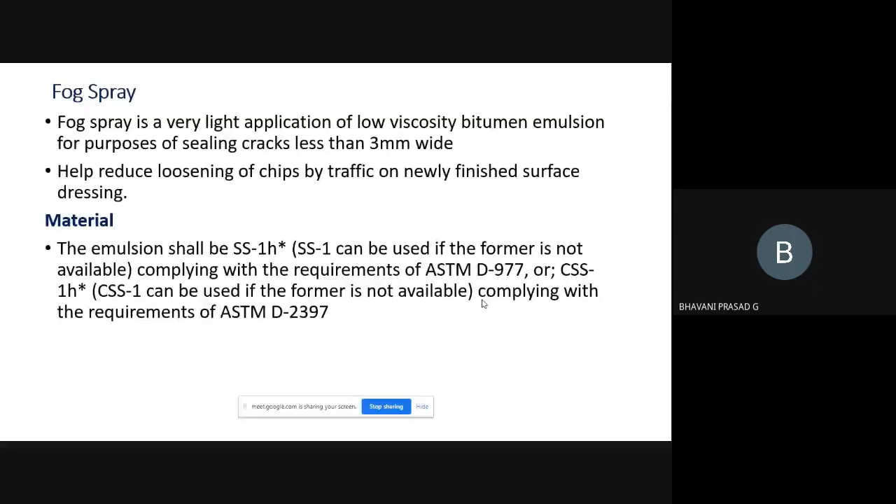So now let us discuss another mix used for maintenance of the pavements, what is called fog spray. Yesterday we were discussing about the slurry seal, a similar mix used for maintenance. Some kind of other mix used for maintenance is fog spray. You may have to remember that slurry seal and fog spray are not widely used in our practical maintenance works. The road agency engineers are not using this widely. They're supposed to use this, but they're not that familiar, or probably not using this slurry seal, or even this fog spray.

But the thin layers we discussed, they are used. The OGPC is widely used. Again, surface dressing is not widely practiced, maybe 15-20 years back it was widely used. Now the widely used thin layer, at least in Karnataka, if at all they are using, is OGPC, mixed seal surface, and micro surfacing. As I said, it is very new, not has become a practice here yet in the country.

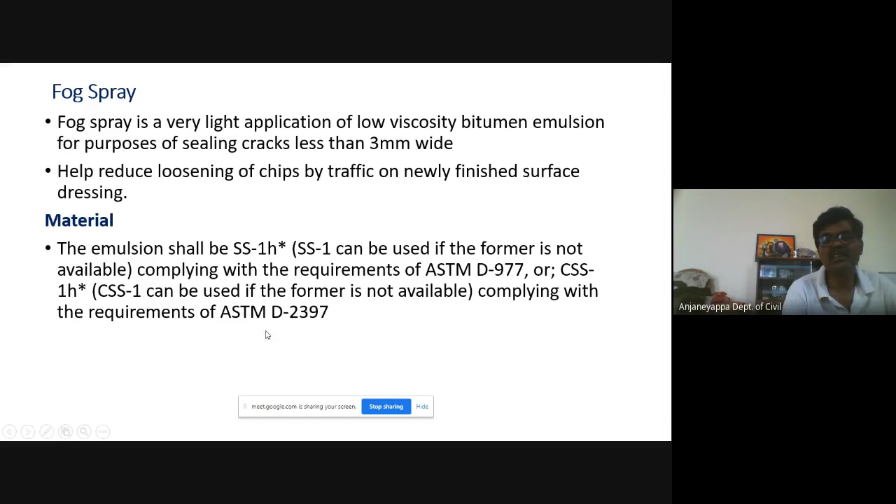The material used for fog spray is SS1, slow setting 1, or SS1H, which meets ASTM D977 requirements. If this is not available, the specification says CSS1H can also be used, but again this should meet ASTM D2397 requirements.

So we can see a video of this fog spray, I'll play that. Am I audible? Yes, sir. Thank you. See how fog spray is practiced. As I said, not widely used here, but these are all very good maintenance activities one should practice for maintaining the pavements as a preventive maintenance measure. So unfortunately, slurry seal and fog spray are not widely practiced, not even practiced, I believe.

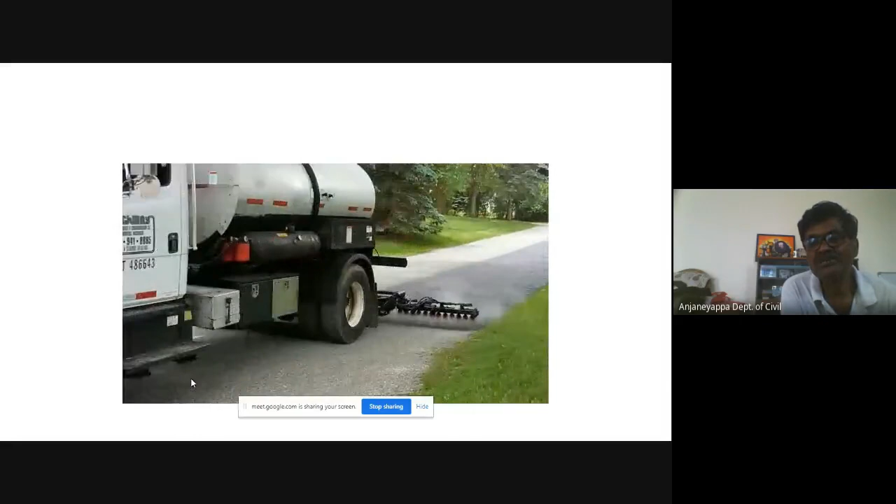See the emulsion spraying machine. The pavement below is highly oxidized, the surface layer, and they are spraying this emulsion, slow setting emulsion. It enhances the life, it seals the surface, it seals the cracks of smaller width.

So this is fog spray, mechanized spray. Before using this emulsion, the emulsion is diluted with 1 part of emulsion to 1 part of water. Alternatively, this type of emulsion can also be used, A1-40 or K1-40, which complies with BS434 requirements, British Standard 434 requirements.

These emulsions, whatever we use, should have lower viscosity. In case you use these emulsions, A1-40 or K1-40, they are rapid setting emulsions, and these emulsions need not be diluted.

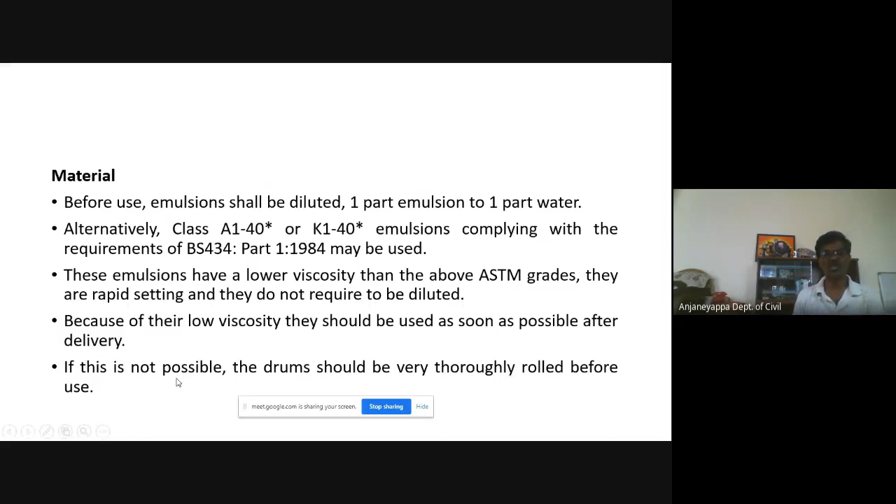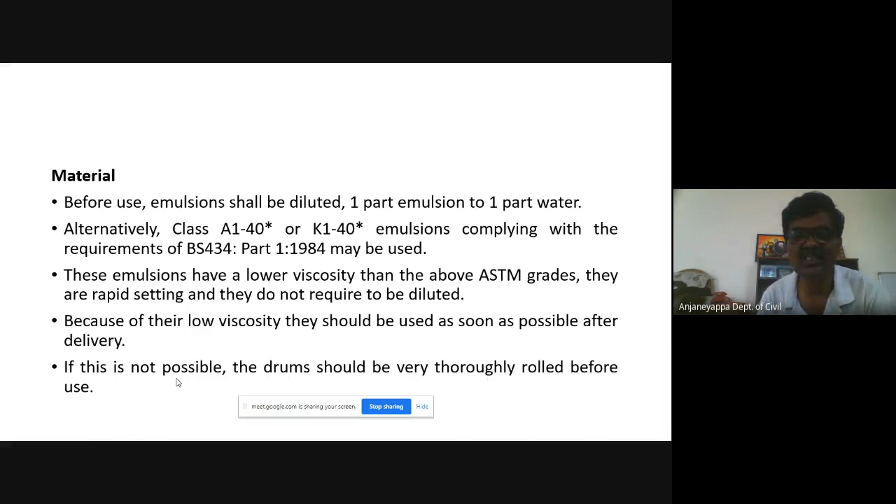So because they are low viscosity, they should be used as soon as possible after delivery. They should not be stored for a long time. Immediately on receiving the emulsion, it should be used for application. Suppose the application is not done quickly, then drums in which the emulsion is stocked should be rolled before use, so coagulation will not happen. So before using any emulsion that comes in drums, they are to be rolled so that the water and the emulsion mix together and avoid any coagulation. This is very important before using any emulsion, irrespective of the type.

So the fog spray shall not take place when the temperature is below 10 degrees centigrade, or during dusty or windy conditions, or even when it is raining. In these conditions, the fog spray is not to be carried out.

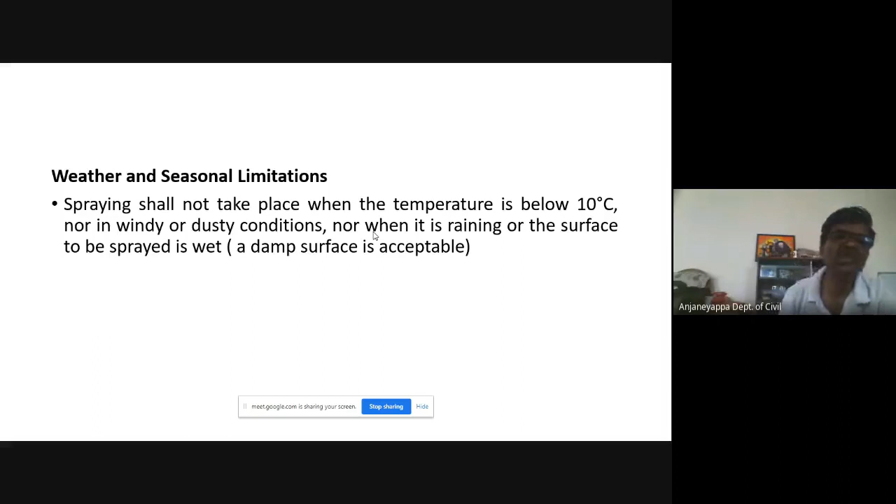So these are some of the construction operations for fog spray. The equipment we use should be a self-propelled or towed bitumen pressure sprayer, similar to the one we have seen in the video. This equipment should comply with the requirements of the IRC manual for construction and supervision of bituminous works. In your free time, please refer to this; it is a wonderful manual for construction and supervision of bituminous works.

They have specified the equipment's requirements. The spray bar, whichever is used for spraying the emulsion, the equipment should be protected from gusts of wind by means of a hood. So the equipment we use, of course, needs to be calibrated.

Preparation of surface is the next step, the surface on which we're going to spray this fog emulsion. This fog spray should be applied on a thoroughly cleaned surface, cleaned using compressed air or even scrubbers. The cracks shall be cleaned with the pressure air jet to remove all dirt and dust.

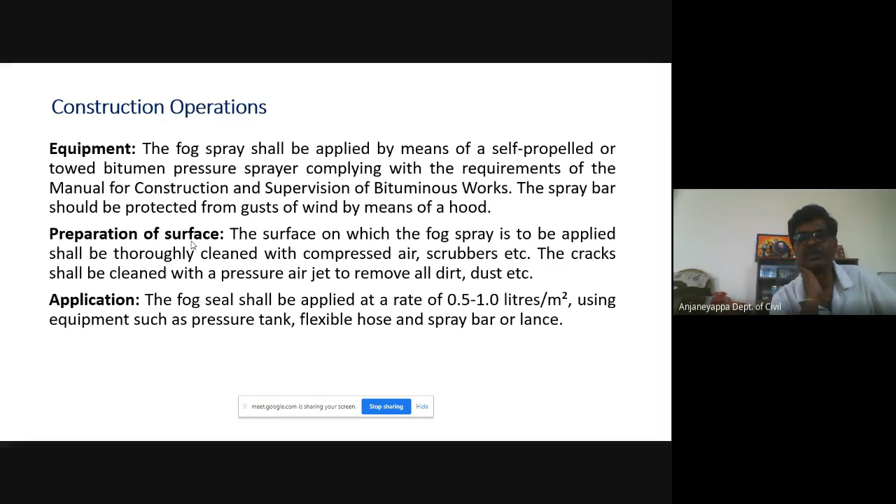Once the receiving surface is prepared and cleaned properly, then comes the application of the emulsion. This emulsion, the fog spray, is applied at the rate of 0.5 to 1 liter per meter square area using equipment such as pressure tank, flexible hose, and spray bar.

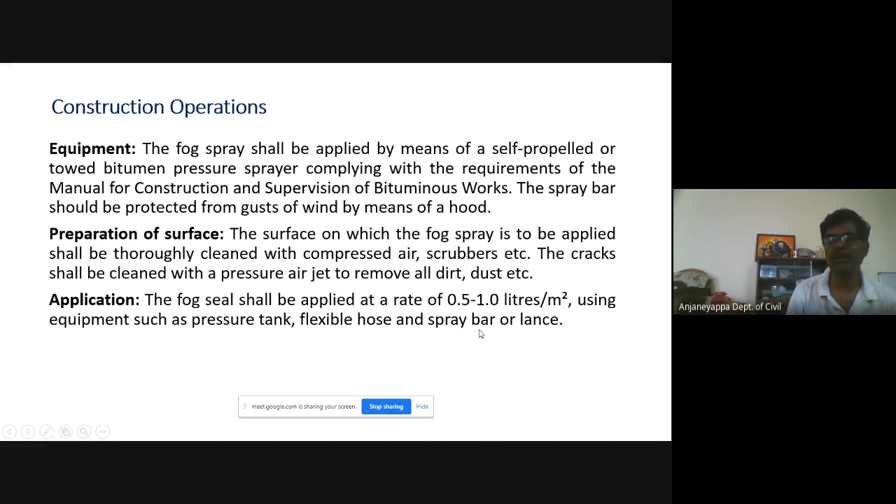If specified in the contract or ordered by the engineer in charge, the fog spray shall be blended with graded grit of 3 mm size. Grit means the small chips, the small size crushed aggregate pieces. So this fog spray can be mixed with this 3 mm size chips.

Chips coated with about 2% of emulsion by weight. This pre-coated grit, the chips, shall be allowed to cure for at least 1 week so that they become non-sticky and can be spread easily. So if you want, you can spray this 3 mm grit size material along with the emulsion. Only thing is the 3 mm graded grit should be pre-coated with emulsion 1 week before spraying so that they become non-sticky. That also can be done.

Then comes quality control during the fog spray. The materials quality should be carried out as per section 900 of the MORTH specification.

Do you have MORTH soft copy, 5th revision? Yes, sir. Please go through that. Only one man is telling? Yes, others are. What about others? Do you have it? Yes, sir. Okay, open section 900, there it is clearly mentioned.

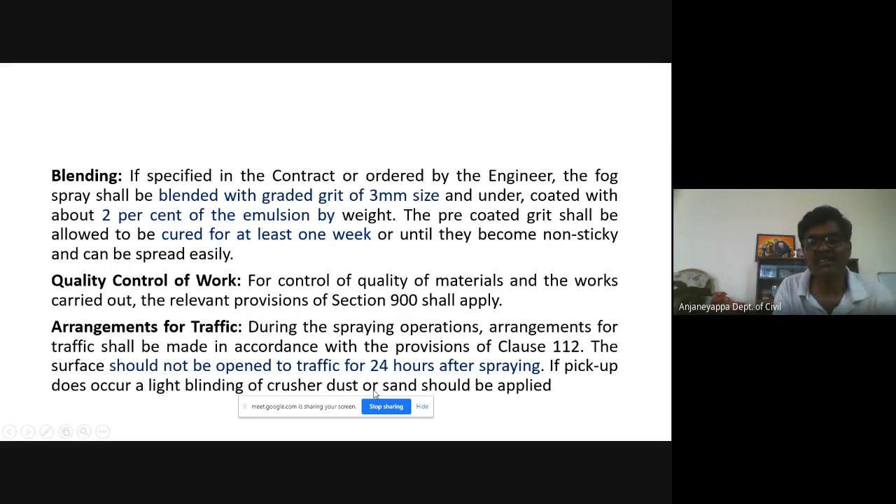Section 900. So during construction, needless to say, arrangements for the traffic are to be made. The surface should not be open to traffic for 24 hours after spraying. This is a tricky issue, we cannot block the road for 24 hours. This is because if the traffic is allowed, the materials will get picked up by the wheels.

So totally, fog seal is designed to coat, protect, or rejuvenate the existing oxidized bitumen binder. It regenerates, it gives a fresh look for the surface, as you have seen in the video. The oxidized pavement, once the spraying occurs, it looks fresh.

So it seals the coat, seals the bottom layer. It improves the waterproofing of the receiving surface, reduces the aging, lowers the permeability, and to renew an old bituminous surface which has become dry, brittle, hungry, this fog seal can be used effectively.

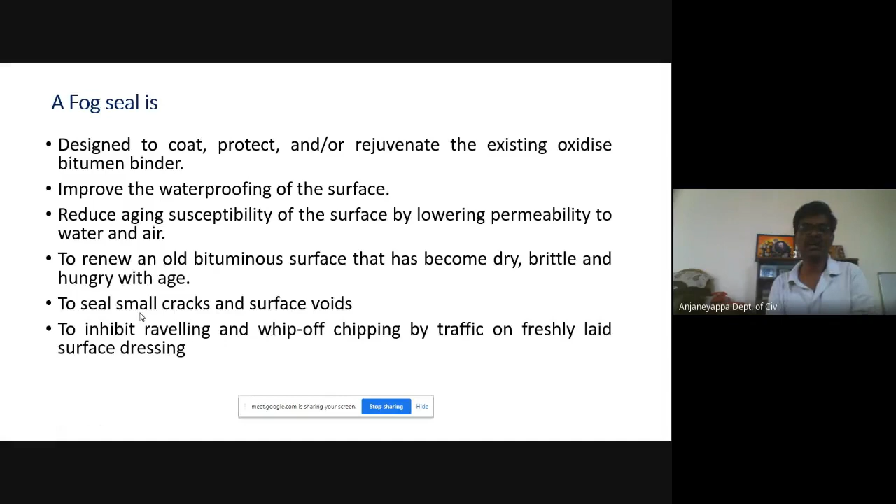And fog seal, as said, can be used to seal cracks of width lesser than 3 mm, and also to seal small surface voids. This also prevents raveling, chipping of the aggregates by traffic, of the surface dressing layer.

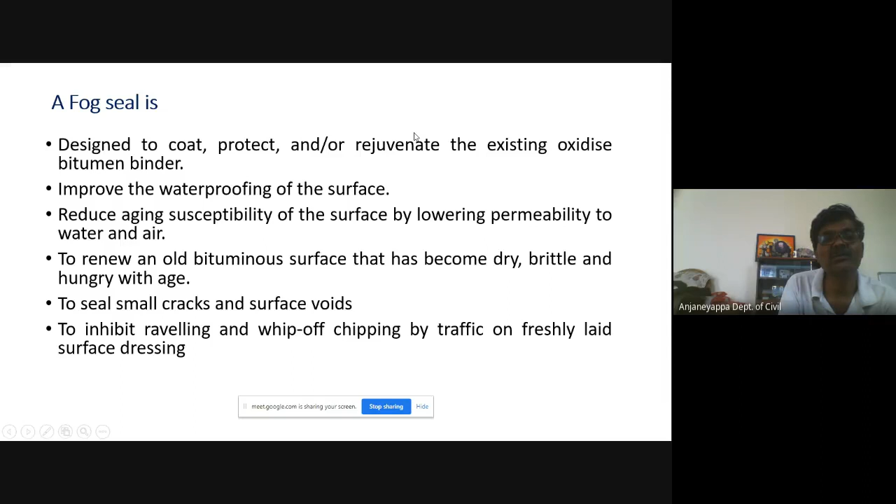So these are some of the applications and advantages of using fog seal. But there again, there are some limitations for the fog seal. They are not useful as seal coats on closely graded surfaces. If it is an open graded layer, something like mixed seal surface, surface dressing, chip carpet, this can be effectively used.

For a closely graded surface like mixed seal surface or dense graded surface layers, fog seal is not useful without the addition of chips, because if you just spray fog seal, that may create a slippery surface. So for that reason, if you add the grits or chips, you get a non-skiddy surface. That is one limitation.

Fog seals are not to be used on a rubberized asphalt concrete surface or polymer modified mixes unless the pavement is 5 years old, as these binders age at a different rate. Many times we use modified binder, polymer modified bitumen or crumb rubber modified bitumen for bituminous concrete surface layers. On such layers, fog spray is not generally recommended unless the pavement is old.

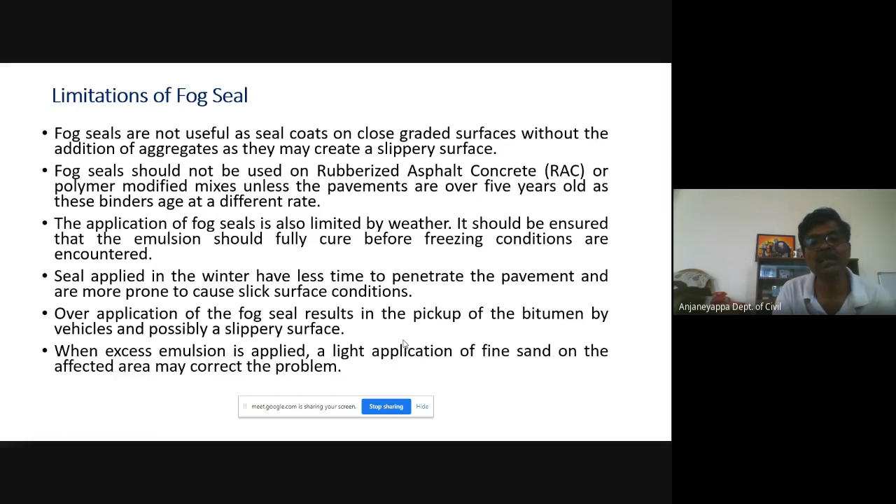But whatever the limitations or advantages, this is definitely one of the preventive maintenance activities used for bituminous layers, and we should practice it, whether it is slurry seal or fog spray. Unfortunately, we are not practicing this in our country.

You can see another one. Then comes crack sealing. Another maintenance activity that we do for asphaltic pavements is crack sealing. The name itself indicates it is for sealing the cracks. See this video, how crack sealing is done.

Am I audible? Hello? Yes, sir. Thank you.

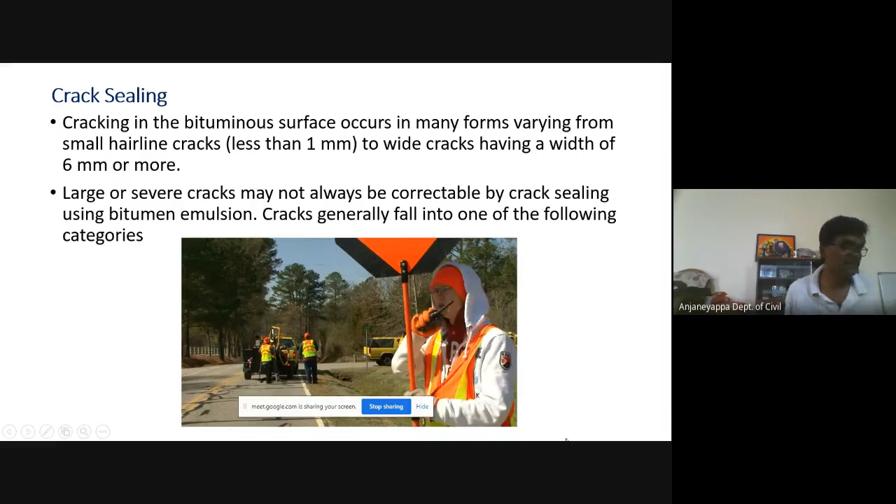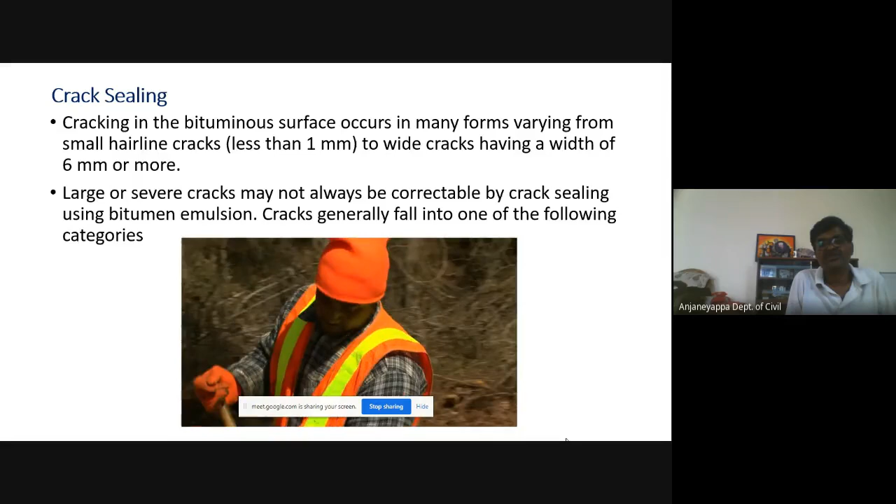Crack sealing is one of the preventative measures NCDOT uses to extend the life of our state's roads. It's a simple and effective way to ensure that our roads last longer and remain safe for travel. When it rains or snows, water can get underneath the pavement and cause cracks, potholes, and other dangerous driving conditions for motorists. In fact, the most destructive element to our roads is water. Sealing cracks will keep water from deteriorating the pavement. It also extends the life of our roadways by 3 to 5 years.

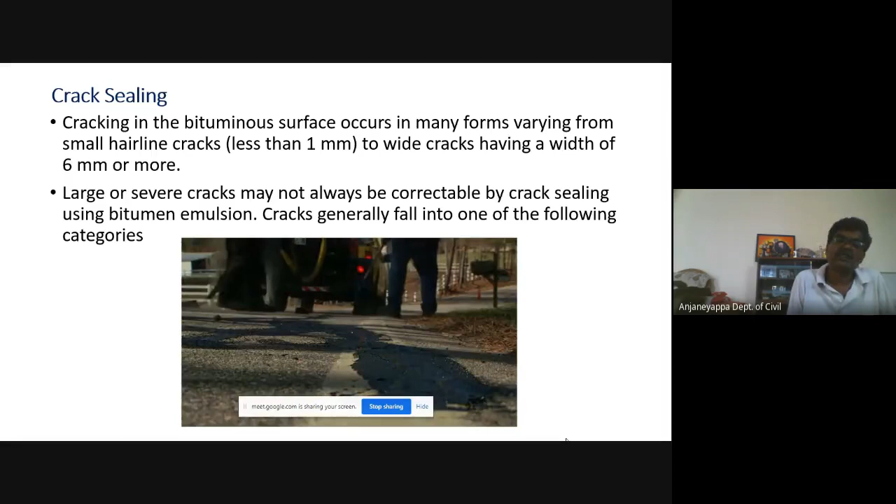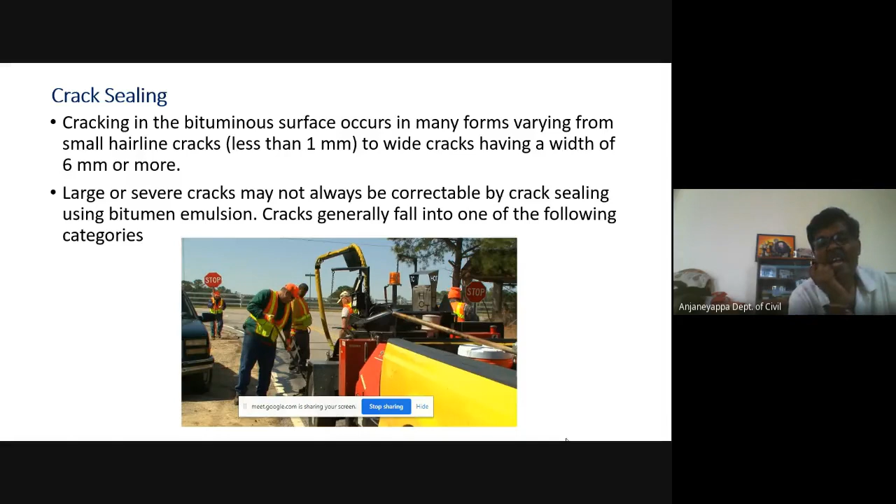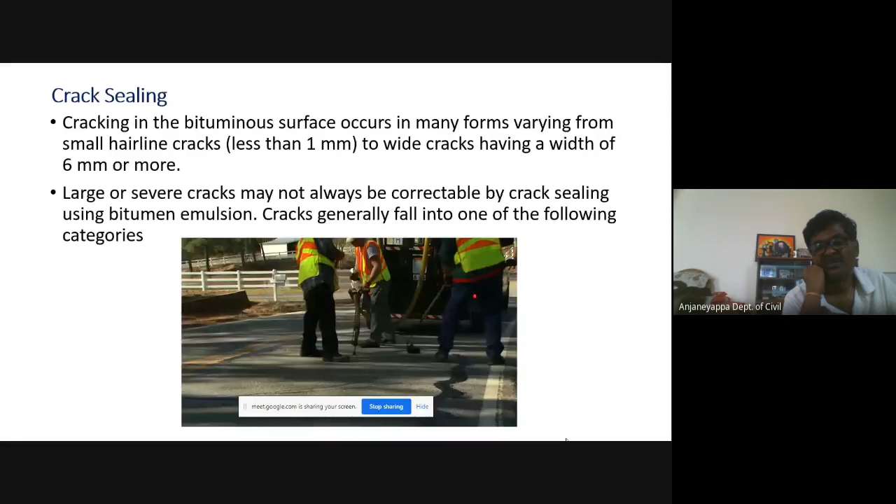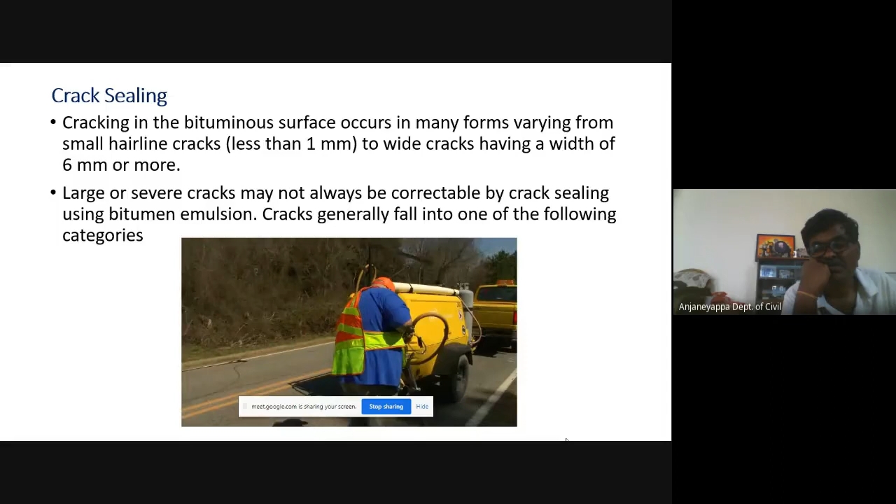As seasons and temperatures change, pavement expands and contracts, and cracks expand and contract along with it. To prevent the cracks from getting bigger and causing further damage, NCDOT uses a rubber material to seal the cracks. The seal bonds to the edges of the crack walls and moves just as the pavement moves, keeping water from getting under the base and subbase layers of the road. However, before sealing the cracks, crews must take several essential steps to ensure the seal is properly applied and that it will effectively prevent any further road damage.

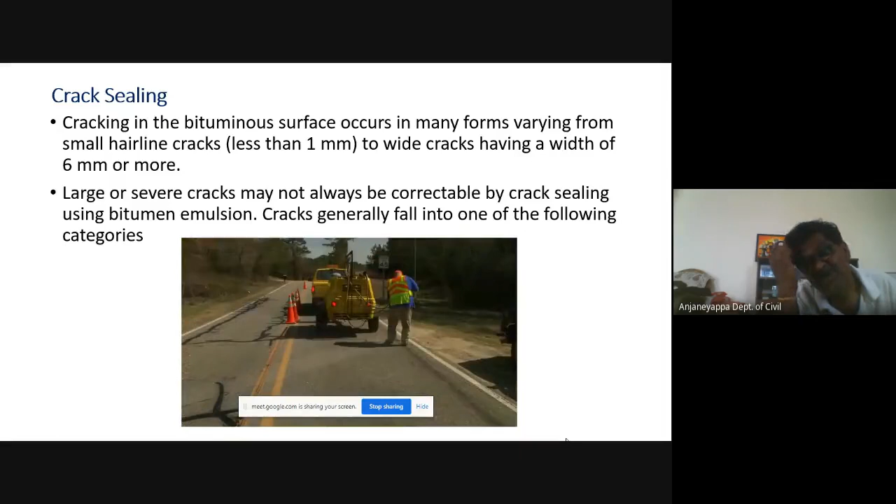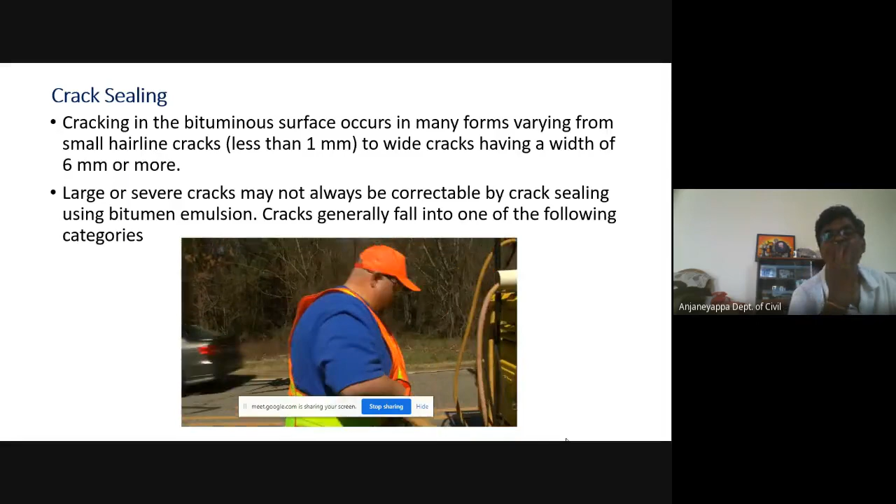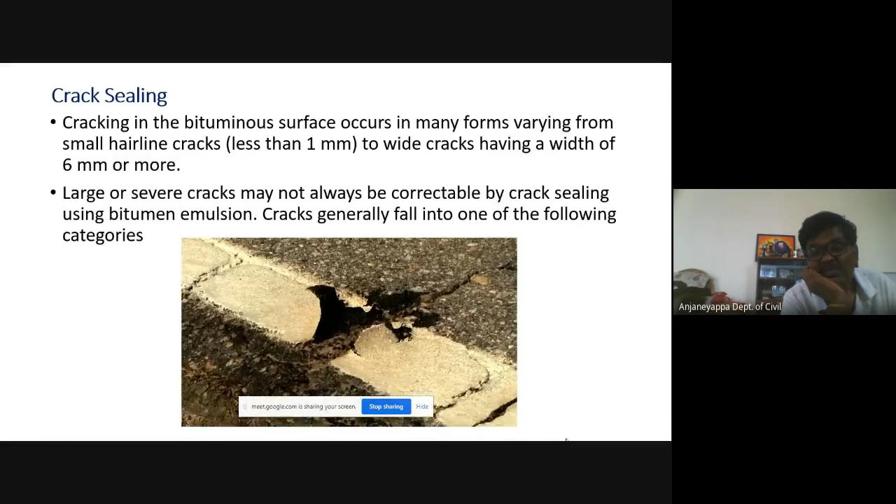Crack preparation and proper application are essential to this process. Before the sealant can be applied to the roads, the cracks must be cleaned so that they are free of all debris to better the chances of the sealant working as intended. To do that, crews use a tool called a hot air lance. This device uses compressed air heated at temperatures exceeding 2000 degrees Fahrenheit. It blows on the cracks to clean and dry them out. The sealant needs a clean, dry surface for the material to bond with the cracks.

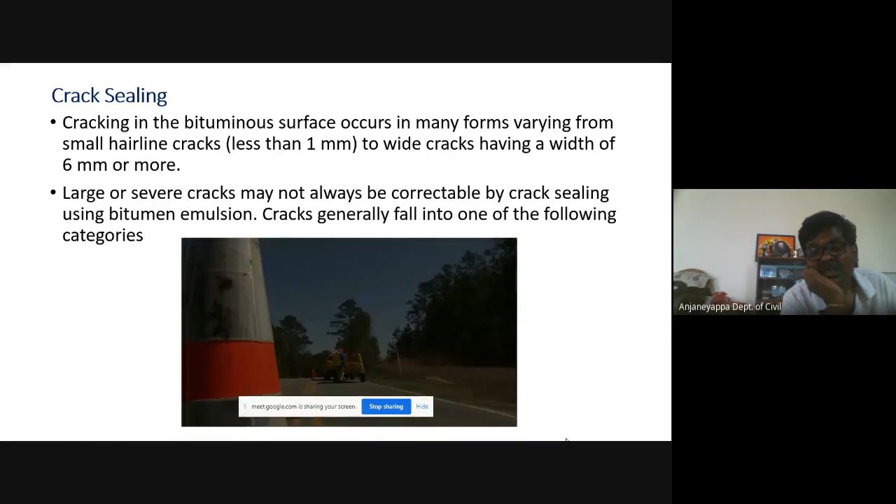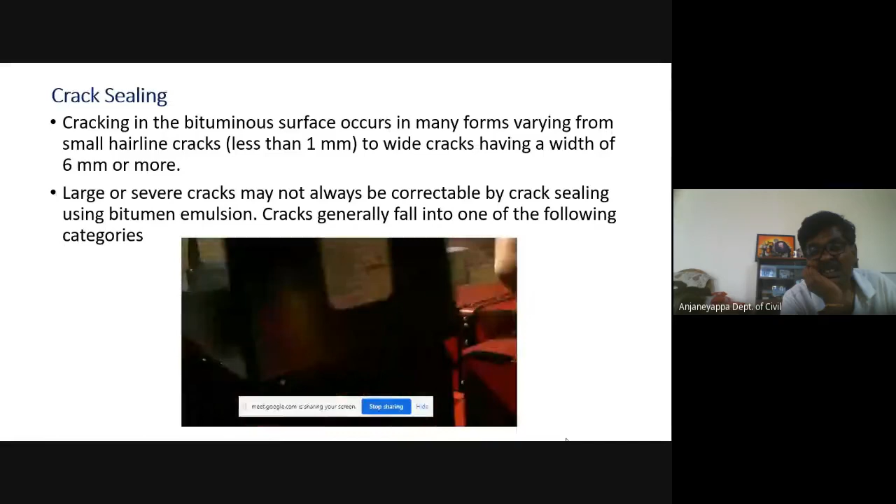Once the cracks are clear, crews can begin applying the sealant to the road. NCDOT uses rubberized asphalt as a sealant. The material comes in blocks and must be melted to around 370 degrees Fahrenheit before it can be applied to the road. Crack sealing machines heat the asphalt into a liquefied form, which is applied to the cracks with a hose and wand.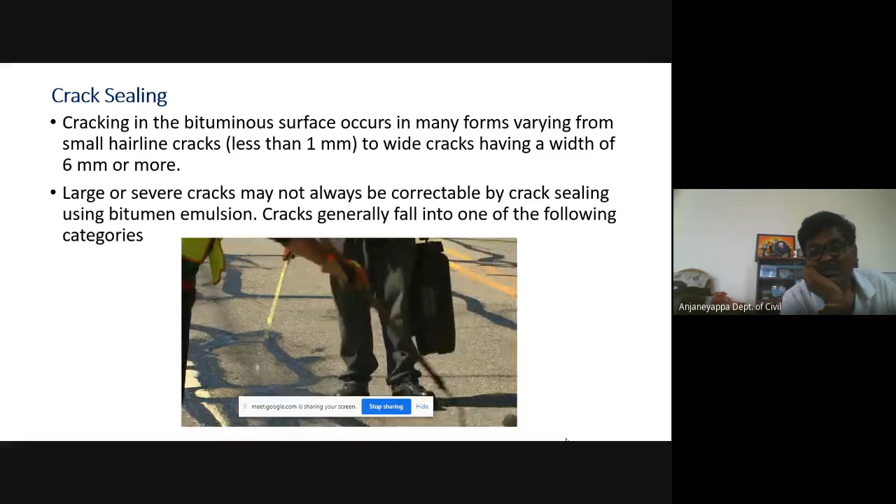Once the material is applied, crews will spray the seal with Glenzoil, a soapy water designed to keep drivers from picking up any of the sealant on their tires as they pass through a work zone.

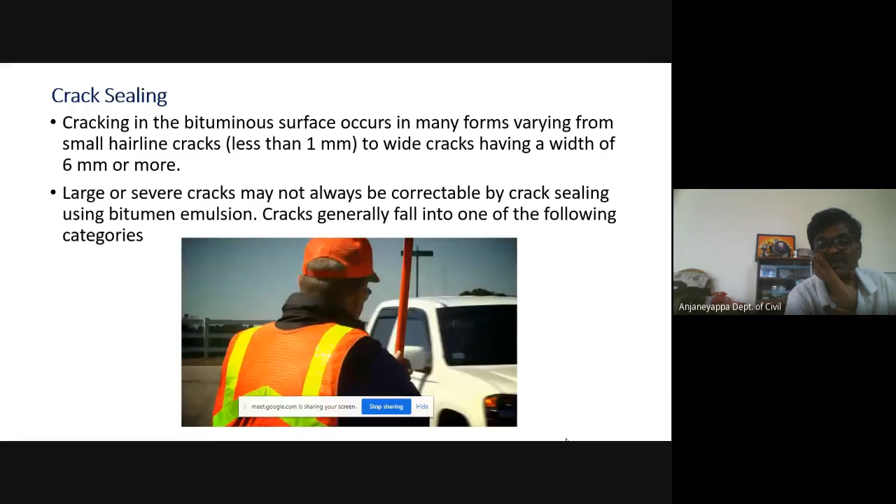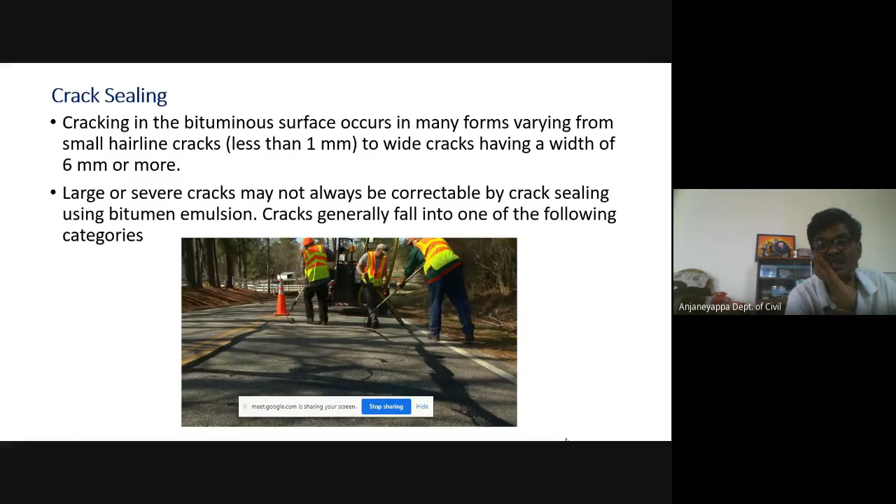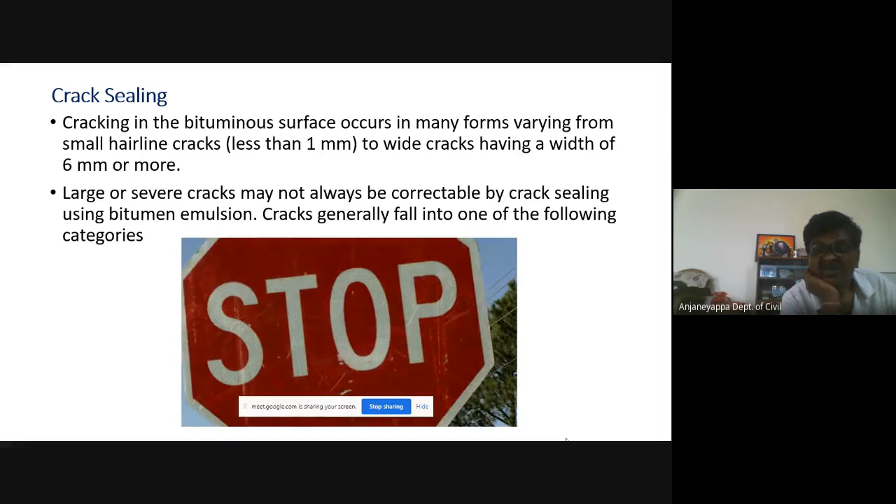Crack sealing is a very cost-friendly way to keep good roads in good condition. By making these inexpensive fixes regularly, we keep North Carolina's roads safe and well-maintained while avoiding costly repairs further down the road. Crack sealing takes place throughout the state from October 1st through March 31st. The next time you find yourself driving through a work zone, remember to slow down, pay attention, and drive carefully.

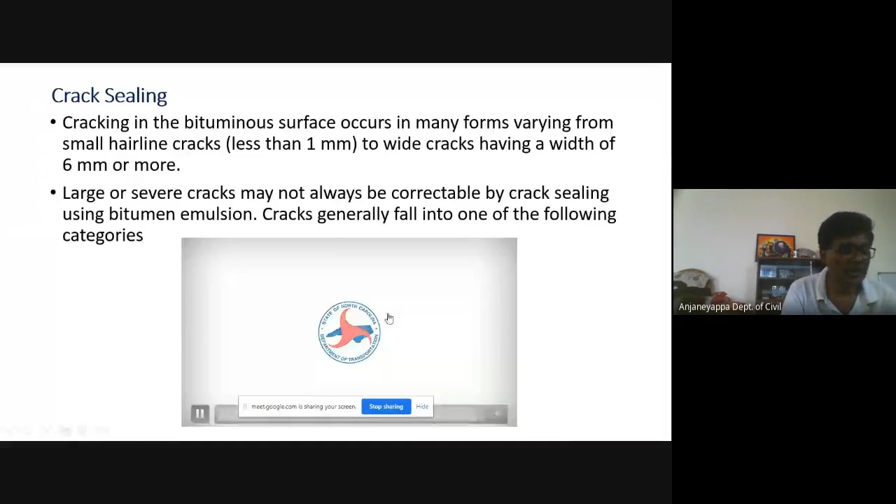So that's the video about crack sealing. Just to remind you of the discussions we had: slurry seal, thin layers, fog spray, crack sealing - all these maintenance activities are carried out to extend the life of the pavement. That's number one.

Number two, it gives some cushion time so that you can defer further major maintenance activities, maybe by 1 month, 6 months, or 1 year or so. That is the biggest advantage of doing all this. Apart from extending the life and giving a good riding surface, you get some cushion time so that whatever major maintenance activities you need to carry out can be deferred by 1 or 2 years or even 6 months or so.

And it saves a lot of money. Unless you do these maintenance activities, costs shoot up by the time you carry out your scheduled major maintenance activities. So you can save a lot of money also, apart from the appreciation from the public. So, crack sealing.

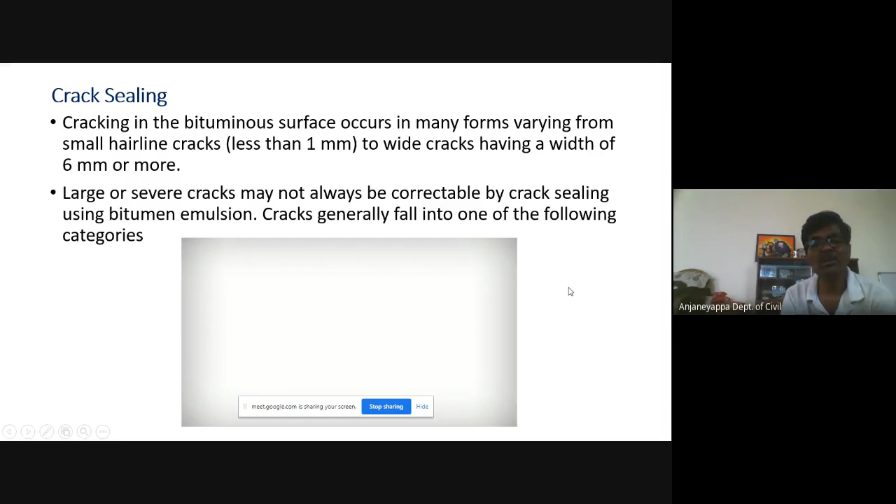These cracks in the bituminous surface occur in many forms, varying from hairline cracks to wider cracks, ranging from less than 1 mm to more than 6 mm or even more. The larger or bigger cracks may not always be corrected by crack sealing using bitumen emulsion. So crack sealing is not a viable or good option for bigger cracks.

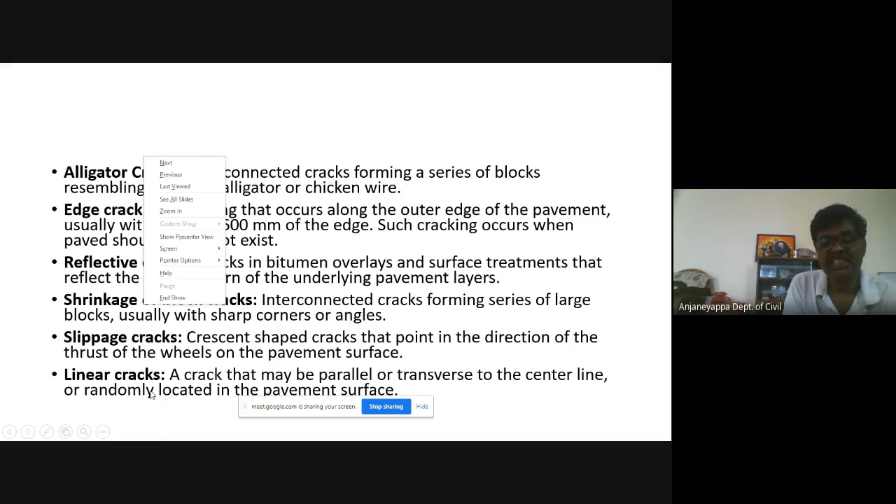So there are different types of cracks: alligator cracks, edge cracks, reflective cracks, shrinkage cracks, slippage cracks, linear cracks. All these things we'll discuss in detail when you come to the third semester, when I discuss maintenance, pavement deterioration and evaluation.

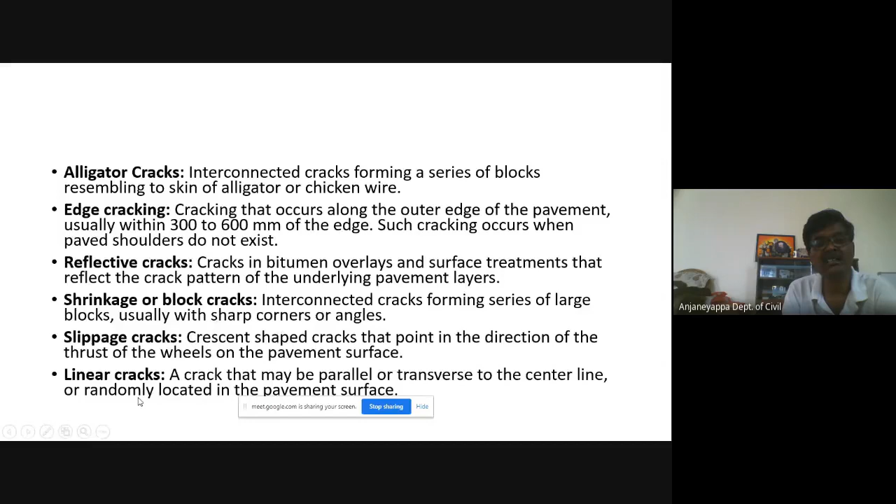For the time being, what you should know is there are different types of cracks and different reasons why these cracks occur on our pavement. But before going into the detail of crack sealing, we should know some important aspects.

If a crack results from deflection beneath the pavement surface, it is always doubtful that sealing of cracks by emulsion will be a good, long-lasting solution. That means if there are fatigue cracks, tensile cracks, alligator cracks - they always originate from the bottom. So in such situations, crack sealing may not be a long-lasting solution.

The best time for sealing cracks is as soon as they develop. The moment you see cracks on the surface, crack sealing should be carried out so that it retards the widening of the crack. So crack sealing should always be done as early as possible.

Failure to seal cracks properly leads to further and more severe pavement damage due to water intrusion. So if crack sealing is not done the moment cracks appear on the surface, the crack widens and more distress occurs on the pavement surface. So we always have to seal the cracks.

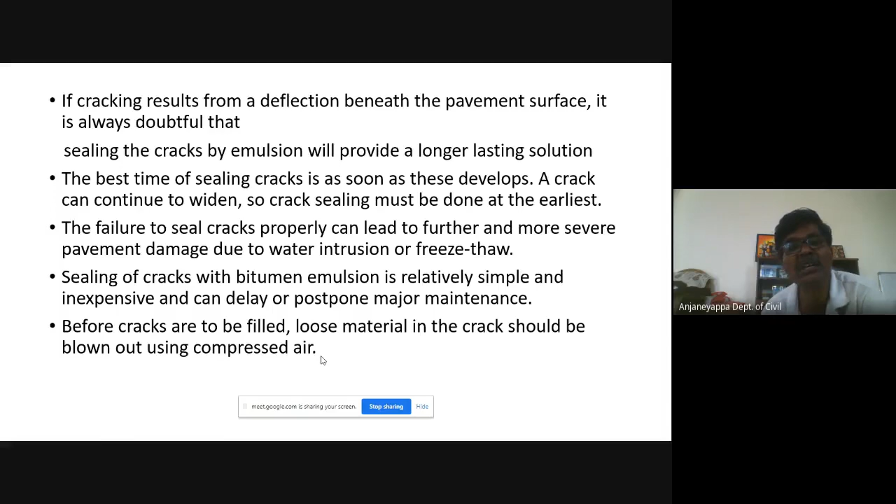As you have seen in the video, before crack sealing, the loose materials in the crack should be blown out using compressed air. In the video, I saw hot compressed air used. If hot compressed air is not available, at least we should use compressed air to remove all the loose material before carrying out this crack sealing operation.

The leftover foreign material, dust and such particles in the cracks, are removed by air blowing or even by using a steel wire brush, or both compressed air and wire brush together. For small and medium cracks less than 6 mm width, as I said, it is always difficult to seal the cracks using the crack sealing operation.

Crack sealing operation: for larger cracks, SS2 grade emulsion mixed with sand should be forced into the crack until it is about 3 to 6 mm from the surface. So emulsified sand, or sand coated with emulsion, should be used for sealing cracks of width ranging from 3 to 6 mm, or even bigger than 6 mm. You should force this sand emulsion, sand coated with emulsion, into the crack at least to a depth of 3 to 6 mm.

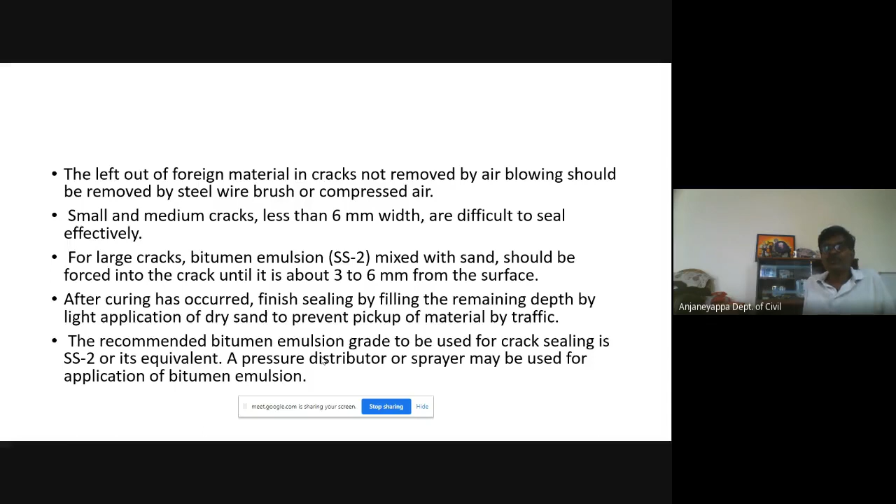After the curing of the emulsion, the finish sealing may be carried out for the remaining depth by light application of dry sand so that vehicles do not pick up the material. If there is a bigger crack, you fill it using sand coated with emulsion, forced into the crack to a depth of 3 to 6 mm. Once that is done, the top portion has to be sealed with dry sand.

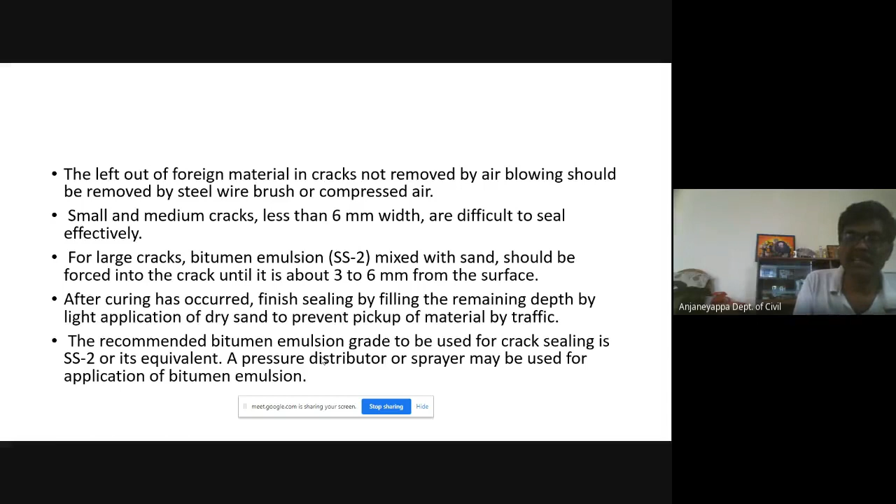So what is the advantage? The vehicles do not pick up the sand. If it is emulsion-coated sand, the vehicles will pick up that sand. So put a light application of dry sand over the forced sand coated with emulsion. The recommended bitumen emulsion grade for crack sealing is SS2 or any equivalent. A pressure distributor or sprayer may be used for the application of bitumen emulsion.

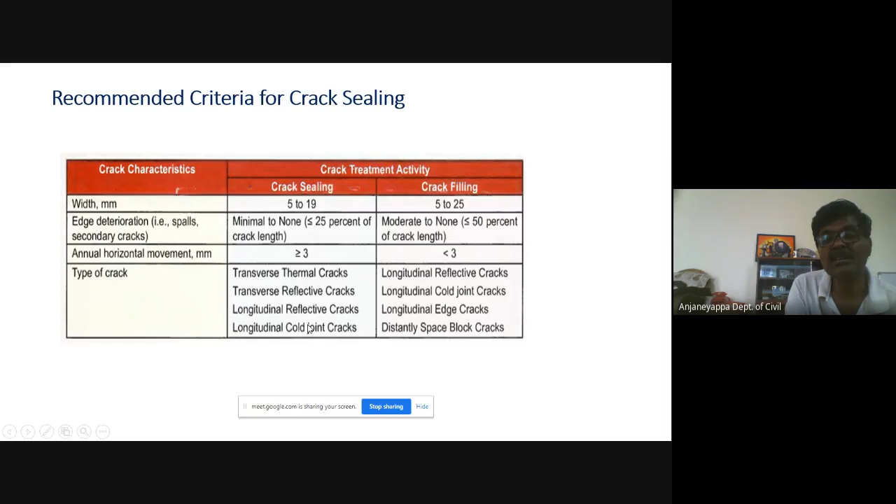These are some recommended criteria for crack sealing depending upon the width of cracking: crack sealing for 5 to 19 mm, crack filling for 5 to 25 mm. If there is edge deterioration like spalling or secondary cracks, less than 25% of the crack length should be sealed, and less than 50% of the crack length should be filled. This crack sealing method can be used for reflective cracks, edge cracks, and thermal cracks. That's about crack sealing.

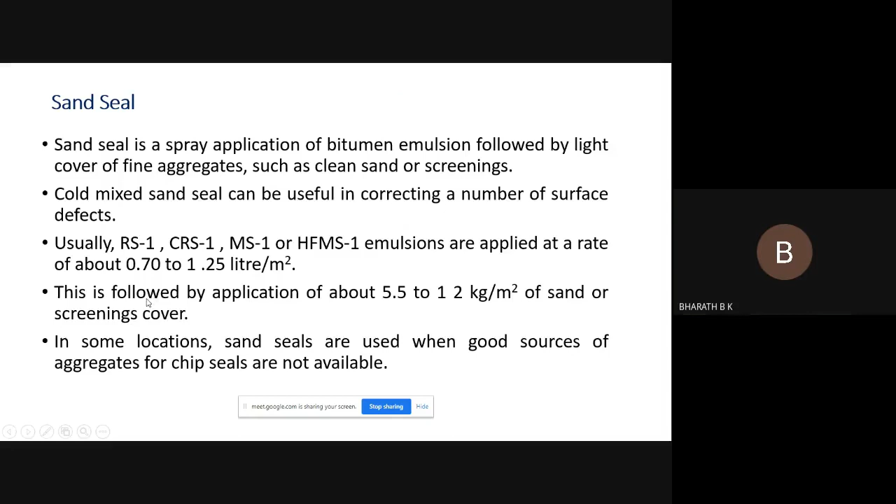Any clarification at this point? Hello? Hello? Yes sir, yes sir. Audible, sir. Others, please. Yes sir, yes sir, who is that? Karthik? Yes sir. Okay.

Then comes the sand seal, another type of preventive maintenance activity we carry out for bituminous surfaces. Sand seal is a spray application of bitumen emulsion followed by a light cover of fine aggregates such as clean sand or screenings. We spray the emulsion, and above the emulsion-sprayed surface, you spray the sand or screenings.

Cold mix sand seal can be useful in correcting a number of surface defects. Emulsions such as rapid setting, medium setting types can be used at the rate of 0.7 to 1.25 liters per square meter. This is followed by the application of sand. After spraying the emulsion on the cleaned surface, you spray clean sand at the rate of 5.5 to 12 kg per square meter, sand or screenings over the emulsion-sprayed surface.

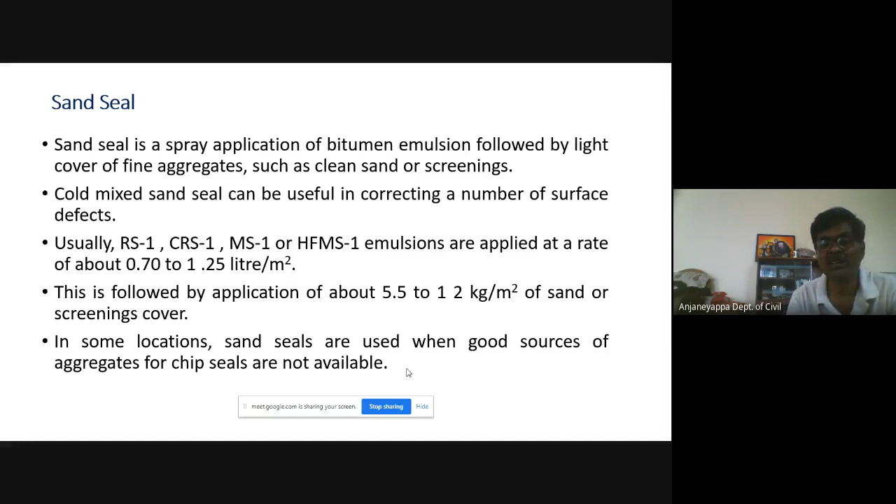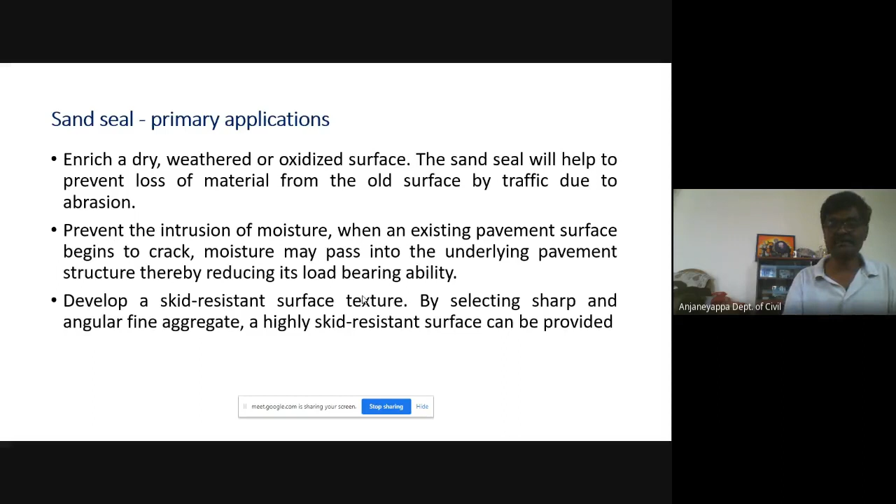That's all about the various preventive maintenance activities we carry out mainly for bituminous surfaces: slurry seal, fog spray, and crack sealing. All these activities need to be carried out for the advantages we get from them. So I am closing down on these topics and discussions.

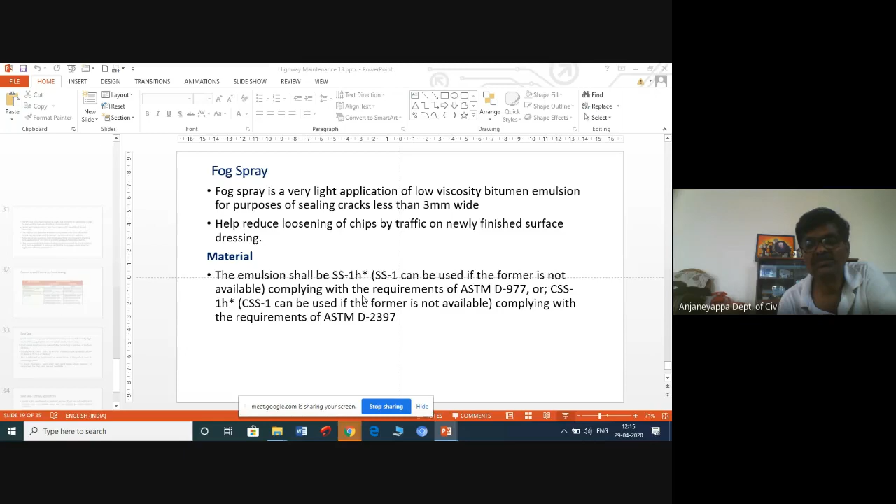For any clarifications, please let us know. Any clarifications? Am I audible? Yes sir, am I clear, audible? Audible, sir, yes sir. Okay, audible, yes, any clarifications please? Are you following? Am I going fast? No sir, no sir. Okay.